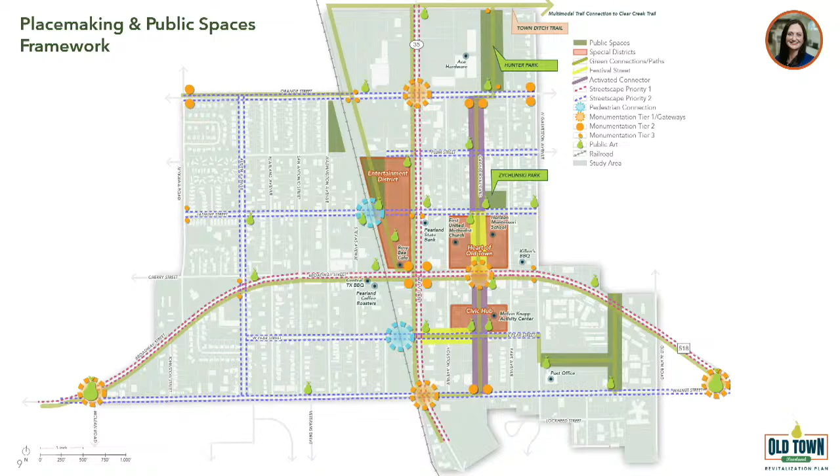Moving into our development and redevelopment framework, this is a compilation of previous planning analysis, previous plans that you all have done, the 35 corridor study, as well as our analysis that we've done as a team, and then the fiscal market economic study that was completed.

So the primary opportunities are displayed in orange. Those you can tell are correlated to the big idea areas as well, but those were the largest swaths of land that were available. So those are our large development sites that we targeted.

The light blue, secondary opportunities, those are areas where we're trying to develop that destination and critical mass. Some of these properties may be designated just from lower value or low intensity. So there may be more parking than necessary on these sites, and there may be an opportunity for some site development or enhancement.

And then other opportunities as well. Those are the third tier of opportunity that we've cited, a little bit more involved in creating development along those sites. So we've created 3 levels, 3 degrees of development opportunities with this graphic.

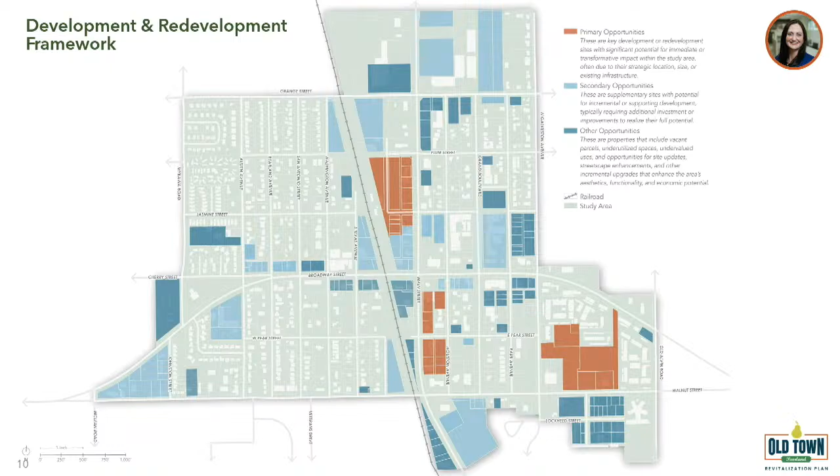One thing we want to share with the group here as well is that we've identified, as you'll see, 5 big ideas, which we think are the first directional phase to implementation of this plan. We recognize as we get into it this afternoon, some of them are going to be short-term solutions that could be almost readily available to jumpstart and build some of that momentum within the Old Town area. And we recognize some of the big ideas are going to be a little bit longer planning terms. There are other factors that go into it as well.

But this map, we don't like to use the word low-hanging fruit or anything else along the planning process. We really like to identify those immediate wins and opportunities, and that's why you will see some of the ideas. What's in orange is really those things that the City Council and the PDC can focus in on right away, and from an attraction standpoint potentially look at development or redevelopment opportunities. But this map also is really a guide for development and redevelopment within the Old Town Pearland area.

Again, looking at different factors, there are other parcels that can be taken down as part of this planning process and evaluated as to where development and redevelopment could occur within the area as well. So it's kind of a priority of first, second, and third, but it's really the guiding framework to where we can start prioritizing some of those incremental investments as well.

Are there any questions so far? Okay, great. All right, let's jump into the big ideas.

This is our key map identifying the 5 major big ideas that we are presenting tonight. The first one is the Depot District. The second, the Grand Link, that's Grand Boulevard from Orange to Walnut. We have Sender's Square, which is near the post office in the southeast quadrant. And then number 4, Old Town Main Street, which is the Broadway Walnut one-way pair conversation. And number 5 is South Junction, just south of Scooters off of 35. These are our 5 big ideas that we are going to discuss.

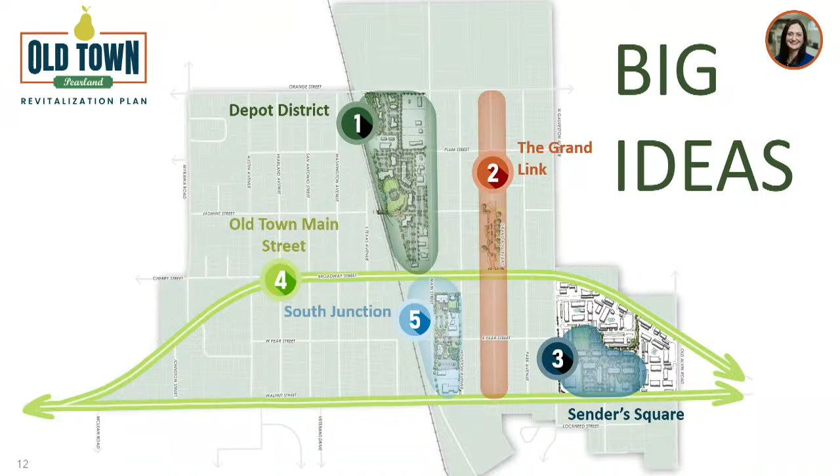Big idea number 1, this is the full extent of the image. Far north is Orange, far south is Broadway, and we've got our railroad tracks on the left and bound on the right by Main Street.

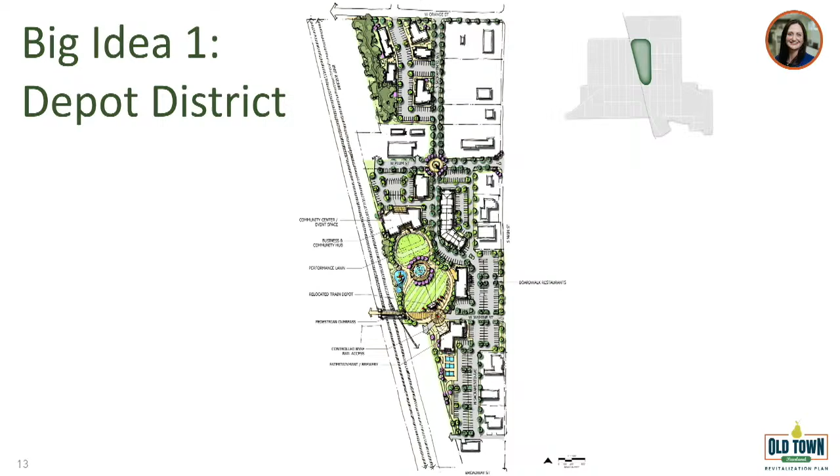Here's a little closer view so you can see the heart of the concept. We've got a major flexible green space. We're creating a community gathering space. We want people to come here after work and have dinner.

There's an opportunity for some amphitheater in the top using the business and community hub. The idea is to have a patio, an elevated space that presents and is able to project onto the sunken green space lawn. So it's almost an amphitheater kind of flex space.

So when it's not in use for an event, it's also just a flexible play space for families. We've got some playground there.

We've got the relocated train depot down at the bottom, which is also surrounded by an art history wall, the Story of Pearland art wall. And then there's our pedestrian overpass just south of that. That's going to be a critical connection for this site, connecting the neighborhoods on the other side of the railroad tracks to this amenity and really creating that connection, which is currently a huge barrier.

The railroad has been a barrier for pedestrian connectivity, so this will be a big choice for this concept.

We've also got space designated for restaurants, entertainment, and brewery options, and we've reserved some space for existing businesses along the major main corridor. In the brewery space, we were talking about some yard games, some mini golf, and restaurants with outdoor dining. So this is a very activated space.

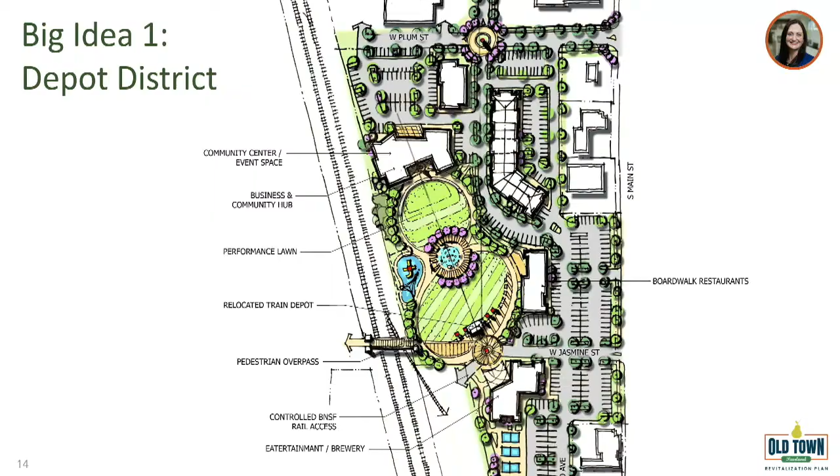So, questions on Big Idea 1?

Are we going to stop and take questions on each one of these ideas one at a time? I think that's probably the best way to do it. So why don't we take a second and open up to council for questions and comments.

Because I did the math, and unfortunately it's wrong. Our city sales tax is 1%, and the EDC is 0.5%. And I think it's calculated at 1.5% for city sales tax.

I was looking it up on the comptroller's website where they have a local sales and use tax history, and I think what they do is our total between us and EDC is 1.5. So it's 1% to the city and 0.5% to... I was using 0.5 cent for the PDC. Our other 0.5 cent the county has. Okay, maybe that's it then. So I misinterpreted, apologies, just wanted to make sure.

Any other questions? I guess I appreciate the comment about forgetting about numbers for now, but this is a great, pretty picture, and I love it, and we can sit here and daydream, but this is a large price tag. At some point, I'm excited to see what we can actually accomplish, and if this is one of them, that's great. Maybe we can talk about funding sources at some point, but I hesitate. I get apprehensive that it's another great plan that everybody can look at, and in terms of implementation, this one alone is 13 million, and those estimates may be low. So I don't know, that's me trying to put a damper on the comments about sitting back and daydreaming.

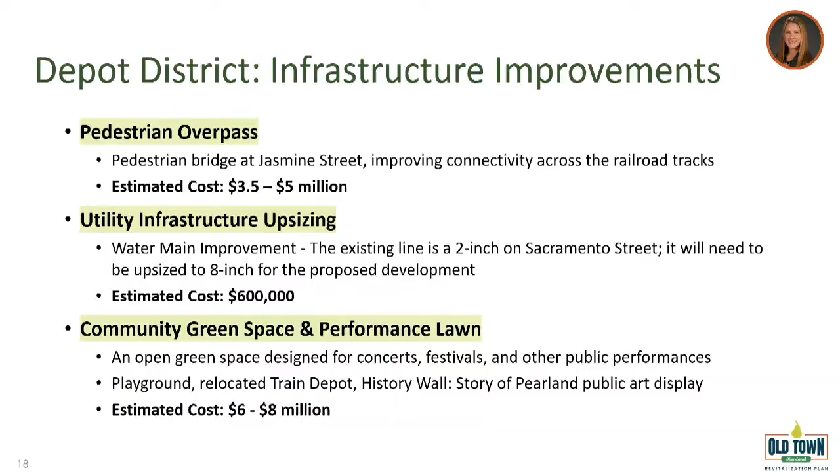First off, what's not on here - I did have a question about the depot. Is that assuming this depot gets moved back, or is it something new that's erected? We heard a lot of feedback through the planning process that there would be a desire to relocate the depot that is currently here back to Old Town, to its original grounds. And so the amphitheater and the green space planned in there was to really enhance that. Again, as Michelle mentioned early on, the art history wall and everything else is really a tribute back to the depot location and the starting grounds of where Pearland began.

So yes, that would be. I would love the opportunity to see it relocated back down there for the right reasons. I wonder if it would survive the move, and that number is not in here anywhere. That would be public.

So I don't necessarily think that everything we're talking about here is public money. I don't see the city necessarily buying the 8 parcels. We're going to find the right developer that we're going to partner with that's going to come in here, and they're going to do that - they're going to do some of the infrastructure, public infrastructure, just like they would with any other developer, right?

The green space - part of the question I have is, is that something that we own? Is it something that a developer owns? Is it something the developer schedules different events for? Is that something that us, along with Tracy and Visit Pearland, schedules and helps put together? I think there's a number of ways that we can get that done.

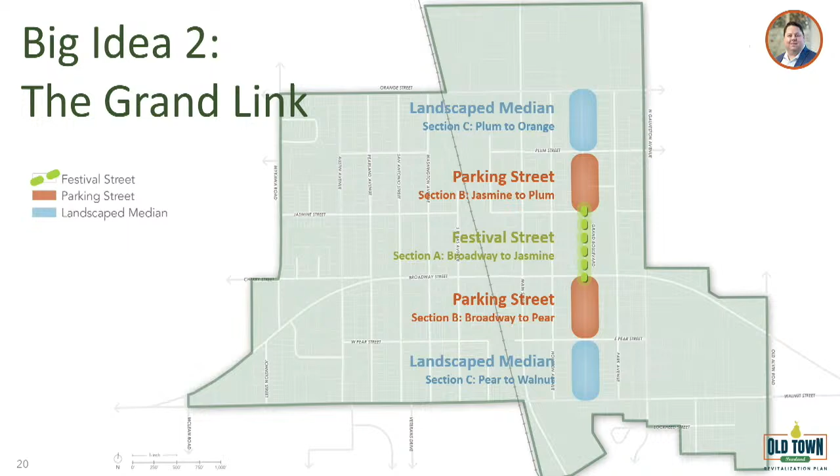All right, going on to big idea number 2, which we're calling the Grand Link, and it's really broken up into 3 different sections. This first section we want to talk about is what we're considering as the Festival Street, and what's out there today, the Festival Street we're proposing is from Broadway to Jasmine.

What you see identified on the map here, the green dashed line, is what's out there today along Grand. This is a concept we're bringing forward to recommend creating this block as your Festival Street that can be closed down. This is kind of a tandem to a bigger idea, number 4 later on, that talks about the heart of Old Town as well. But from a destinational standpoint, and from what we've heard through the Cultural Arts Master Plan and all the feedback we received, it's really about identifying different opportunities for festivals and reasons for people to come into Old Town. We believe this is one concept that could have a lot of traction here.

The Festival Street, as I mentioned, is from Broadway to Jasmine, and would involve converting it, removing the pavement that's out there today and bricking it over. On top you can see a configuration of what would be the day-by-day use, maintaining the parking that's out there and the drive lanes. The entire road of Grand right now, though it is a public road, should be considered almost like a parking lot when you look at the 3 sections linking together at the end of the day.

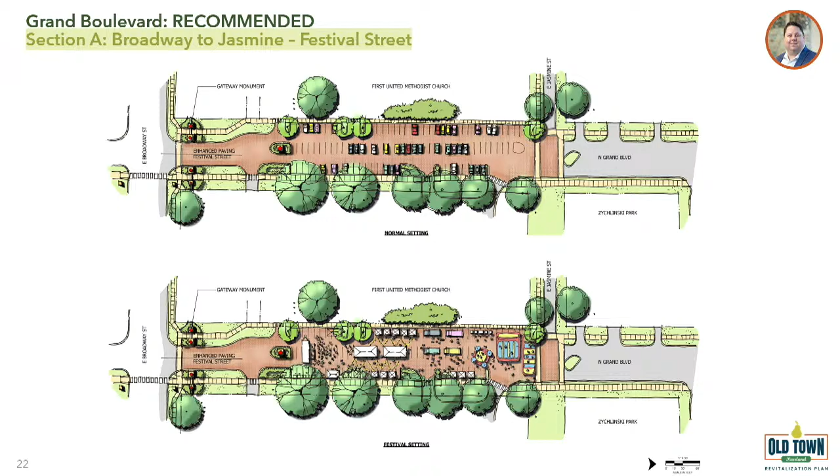Just to the north of Jasmine, on the northeast corner, would be Zychlinski Park. We've had a lot of back-and-forth conversations about whether we want to extend the Festival Street further or not. We'd recommend keeping it at Jasmine, just from a traffic flow standpoint and to maintain the parking that's out there. There are some existing driveways and homes across from the area, but we feel the look and overall feel is better this way, especially since it's not activated out there today.

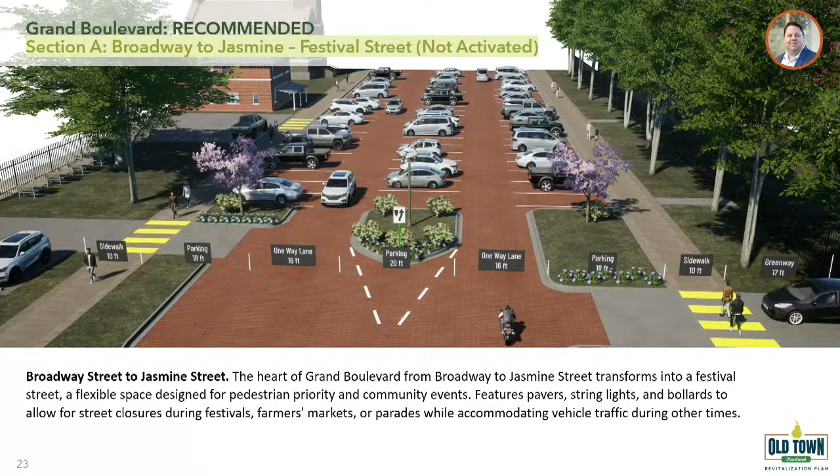So again, you have the entire space within the right-of-way to be activated with all different events, whether it's a farmer's market or any other type of event that could be part of that activation. I'm not going to go through all the numbers here due to time, but you could certainly break up Grand into different phases if you wanted to take an incremental step approach.

Baxter did run some initial numbers on the first phase, which would look at a full reconstruction of the roadway out there, putting in the brick, and different pedestrian enhancements at both intersections, including the expanded sidewalks.

We would recommend the potential for utility burial there as well to really make it a pedestrian aesthetic space along there, with some decorative lighting and street furniture. Also, what's not shown here is we suggested different public art displays along the entire corridor.

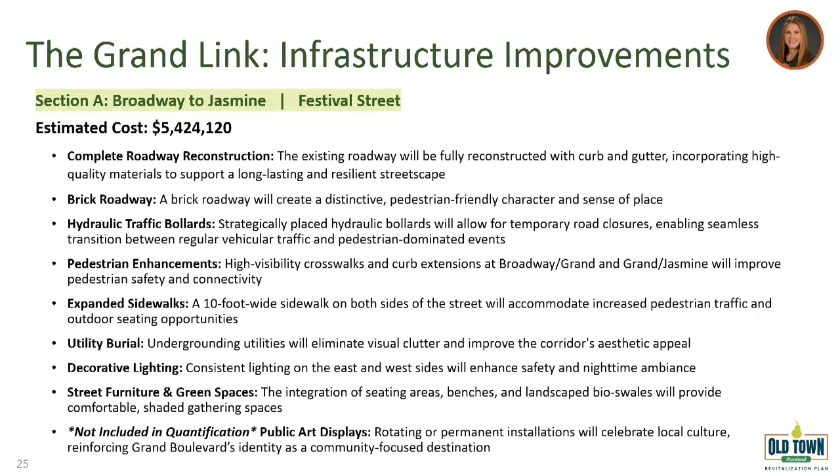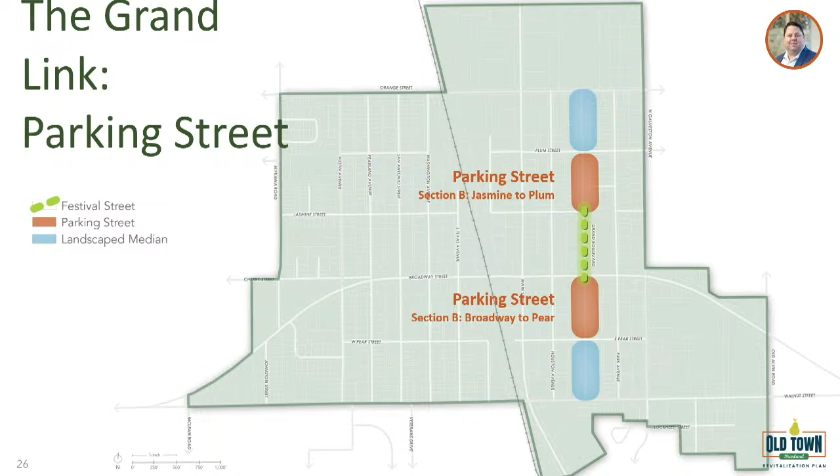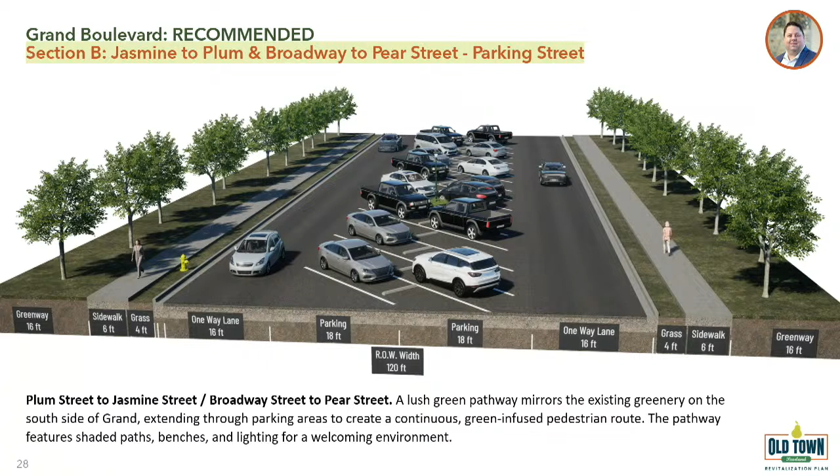This is what we would suggest as a long-term recommendation. We still think keeping the parking in the middle is most beneficial to maintain the character that's out there today. But this would be a reconstruction, putting curb and gutter in along the streets, really defining that public edge that isn't really there today. Right now you just go right off the road to the sidewalk, so we want a pedestrian buffer with a lush green space on either side, with the sidewalk adjacent to it.

This really ties into what's out there today with minimal cost to reconstruct. We'd want to widen the sidewalks, really defining that area, with center parking using removable stop blocks. If you wanted to expand it or close another block off for festivals that got grand and grandiose needing additional space, you could do that — really looking at having a wide open space in general, incorporating decorative lighting and street furniture along those lines.

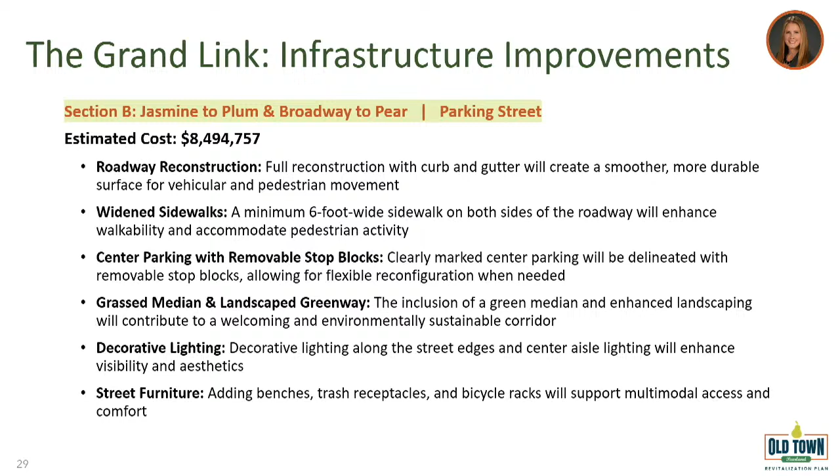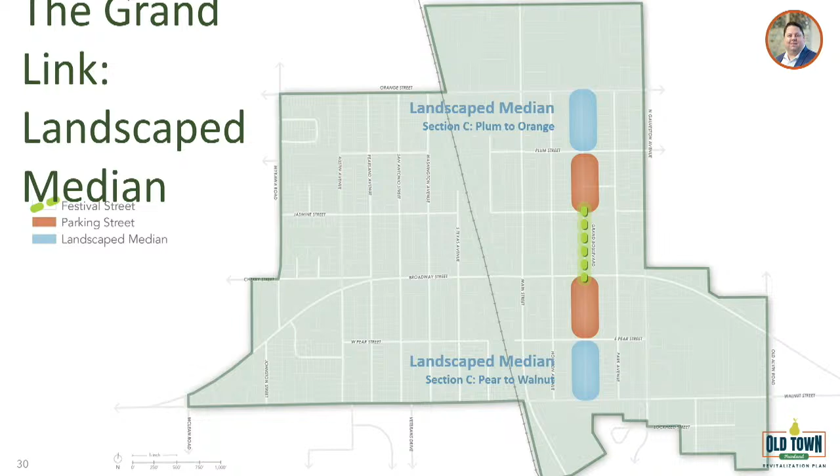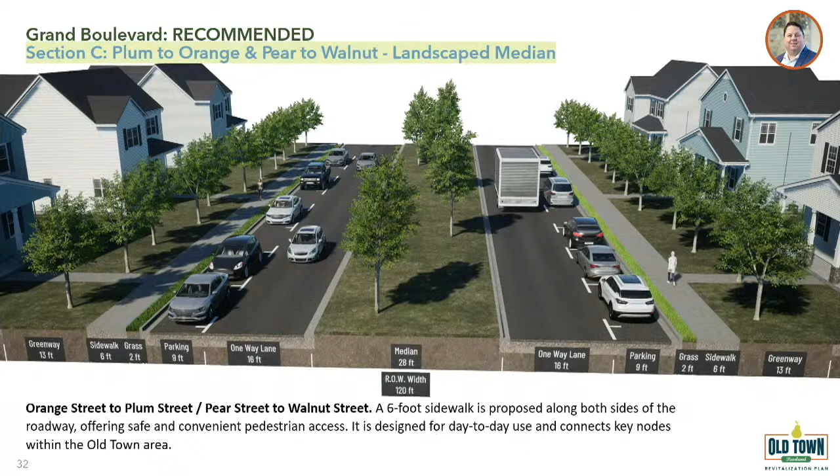Continuing to maybe look at putting in some parallel parking there. You have a pretty wide right-of-way out there today; this may need a little modification. Some elements have been recently reconstructed on the southern side, with parallel parking on the side of the road. We understand this probably needs updating, maybe putting some islands out there to break up the parking and everything else.

But in general, maintaining the same character that's out there — we don't want to be ripping out trees as much as possible. Throughout this whole corridor we try to minimize taking out the existing tree canopy, not eliminating any trees, but enhancing it to maintain the character that's out there today. On the south end right now you just have a very blank green median, so we're looking at incorporating additional landscape and trees, and continuing to expand the sidewalk to create that north-south connection all the way through, defining the overall public right-of-way and separating it from the pedestrian standpoint. Our team has also put some numbers together for what it would take to reconstruct some of those sections.

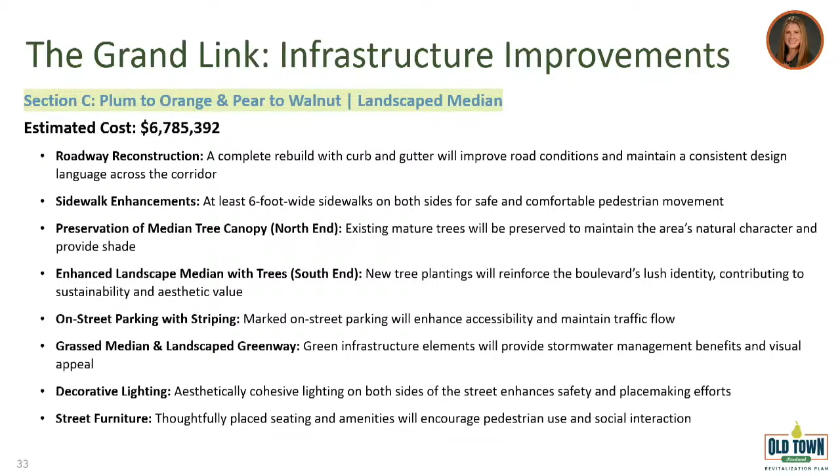That was a lot, pretty quick, but... Yep, start with you, Henry. Thank you, Your Honor.

Just a quick concern — I love the in-to-out approach, focusing on what could be the festival-type place with additional parking on the interior, then slowly minimizing that as you get into the existing home space. My concern is I don't know what that would look like from a potential festival right there at 518, crossing into parking, the majority of the parking space, the green section, and how it ties into Broadway, whether Broadway is one-way or two-way at that point. That would be my only concern, but other than that, it's a great concept.

I think Grand Avenue has always been set to be redeveloped and do something nice with. I'll say I had an even bigger sticker shock when I saw some of those prices. But looking at what we can do, and maybe when we break down some of these costs and where we can have savings, and especially if we can piecemeal parts of it to what we want to look at, I think it's nice to say, let's do the whole Grand Avenue, but maybe it's let's create this space, and that's something we can focus on.

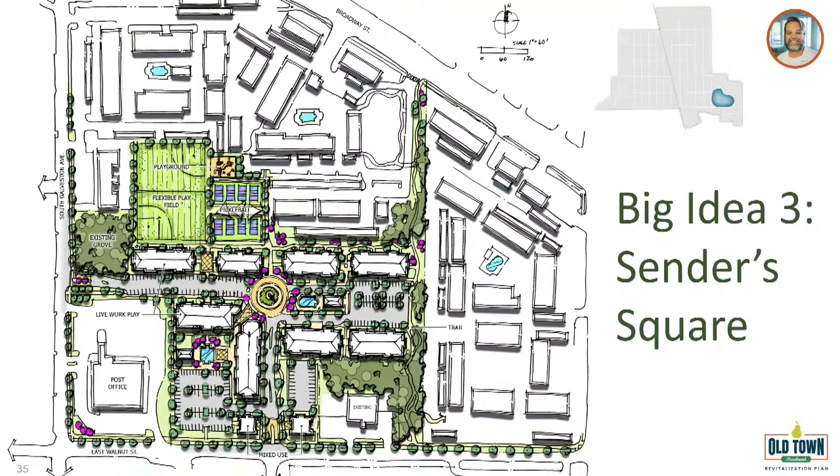Now, the redevelopment stuff is not shown on this map. It'll be on the other side of Walnut. But that's a summary of these things. These are all internal pieces.

Steve, you want to go over this?

I'll just say on the numbers, similar approach was followed to what you saw for Big Idea 1. So you can see the estimate there of about $140,000 annually in property tax collection.

Okay. Any questions on 3? Open up to Henry and your gang.

I'll start. So again, great concept. My initial concern would be parking. If you're doing a multi-level restaurant, livable space, workspace, multi-level there, that's a lot of parking that's coming through.

I don't see a lot of gray color. And so I fear maybe a multi-level parking deck to support it, but I get it. It's Old Town, and that might not be the best. But again, if you're looking at City of Sugar Land, that's got all of that. They've got a multi-level parking deck that supports all of that, right there in that town square area.

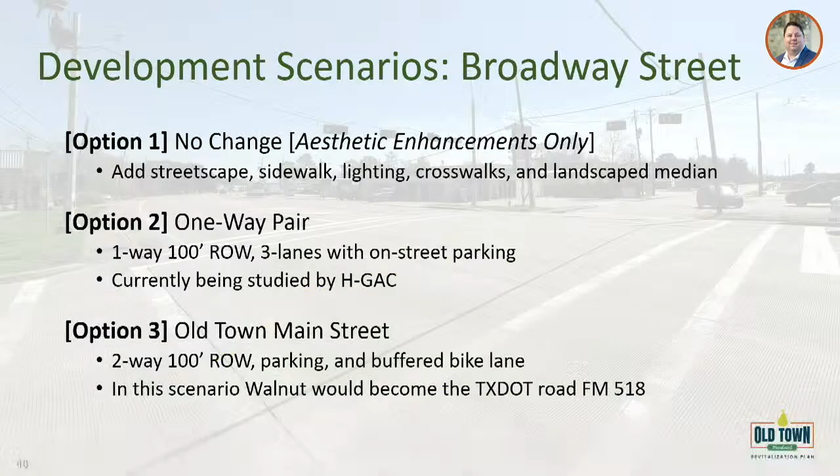That option is looking to consider redoing Broadway as more of a 3-lane cross section. So this would reduce the lanes currently there from basically 5 lanes down to 3. You would be putting in a center grass median turn lane to support turning movements at key intersections along the corridor. This is from Woody Street all the way to Barry Rose Road, the big eyebrow of Broadway as a whole, as you can see on the map. It's about a 1.7 mile road reconstruction that we're considering.

But taking into consideration all the feedback and wanting to make this a walkable destination, connectivity, a place for people - really what we think is best for Old Town - this puts the focus on people over cars. What we're considering here would be just 1 lane of traffic in either direction, on-street parking, wide sidewalks, greenways and buffers, along with the addition of a cycle track.

Both your mobility plans and other plans out there today identify some form of this. You have an existing bike lane right now that is pretty unsafe, in our opinion. So providing more of a protected buffer along Broadway, we think, would be a huge improvement to this area. But we understand that this transformation is not going to happen overnight.

This is something that, when we talk about the 5 big ideas we're presenting today, is not going to happen over the next year or two. There is planning, there's a lot of things that need to go into it, but we think setting the vision now for the long term would be in the best interest of what Old Town could be moving forward.

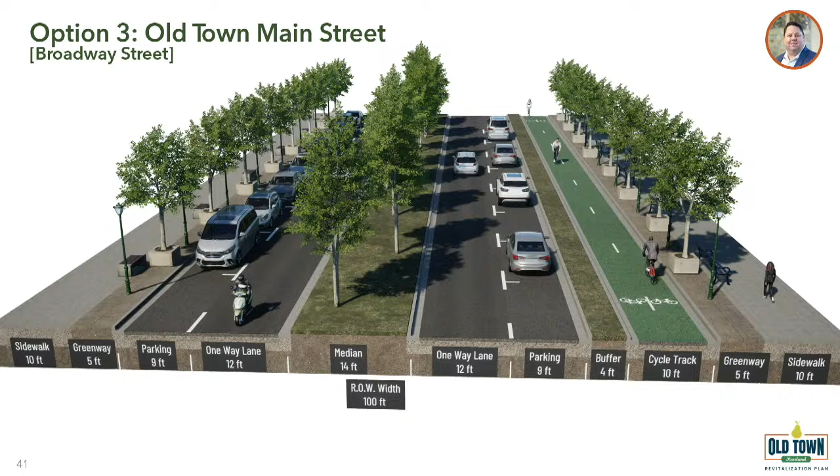Looking at this from a program standpoint, this is really about reconstructing the roadway with infrastructure upgrades as well. As I mentioned, the reduction in traffic lanes, the landscape median - right now we're estimating anywhere between 50 to 75 million for this 1.7 mile roadway at today's dollars.

One of the big things that needs to be worked through is the underground utilities, franchise fees as part of this planning process. But the benefits you get from the people and the public perception would be that buffered cycle track, the enhanced greenways, the expanded sidewalks - really that public realm and place that you want to call a destination for Old Town. We think that could be achieved by going this direction and considering Old Town and Broadway Street as your main street.

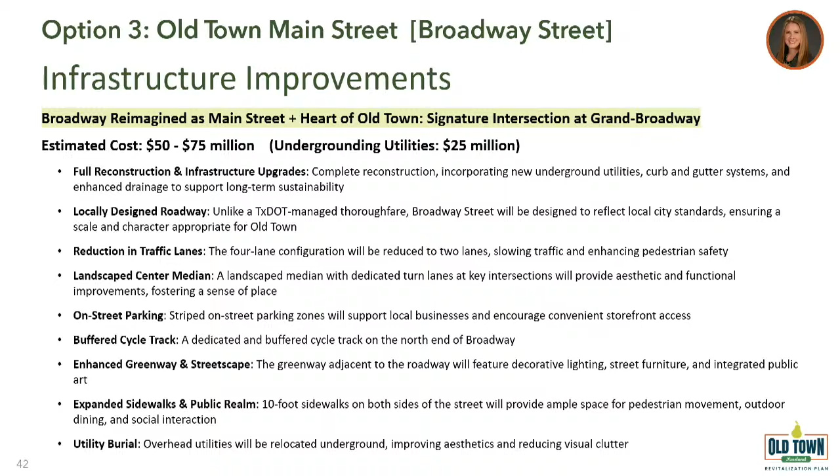Included in that would be an extension - we talked about big idea number 2, the festival streets, which is really the connection of Broadway and Grand. We see this as kind of the signature intersection, so we would look at creating a raised intersection there. The assumption here, and we'll get into what happens on Walnut Street as well, would be a potential turnback program. This would most likely be long-term, potentially a public road that would be turned over to the city at some point as part of this.

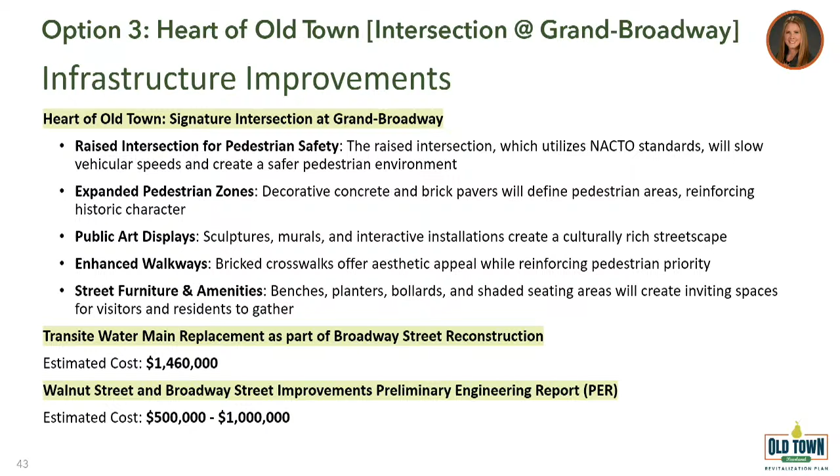But again, it's the opportunity to slow down the traffic, really focus on people, expand the pedestrian opportunities here through this enhanced and pedestrian-safe raised intersection at Grand and Broadway, along with different street furniture. So a raised intersection is really narrowing in the area, almost creating an elongated speed table going through this area. We don't anticipate this would be a stop-and-go light, maybe at a minimum a stop sign, but it's really focused on slowing the traffic down, creating that heart of Old Town as part of this enhancement along Broadway as well.

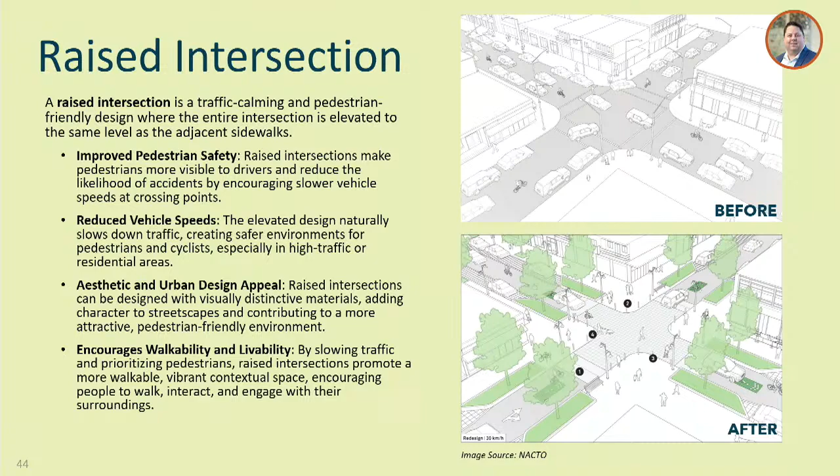In order to achieve this option in this vision, you would need to look at the expansion of Walnut Street as well. Right now, Walnut Street is for the most part a 2-lane road. We understand you're evaluating it as part of your one-way pair study, but looking at today, from a phasing standpoint, this would become your future FM 518 - the major east-west thoroughfare connecting Broadway on either end, with Walnut being designated as the new FM 518, and Broadway then being turned over to the city long-term.

In this scenario, there would be additional right-of-way required to implement this vision. You have chunks of Walnut right now that are anywhere between 70 and 80 feet of right-of-way. You would need to acquire some additional right-of-way to put these enhancements in. But again, this is a scenario to transfer the lane usage.

We're looking at what you have out there today, which is 6 lanes between both roadways. You're repositioning Walnut Street as the major east-west thoroughfare, and then really converting Broadway into that pedestrian realm and environment that we feel is extremely beneficial and meets the goals and values of what Old Town Pearland could be long-term.

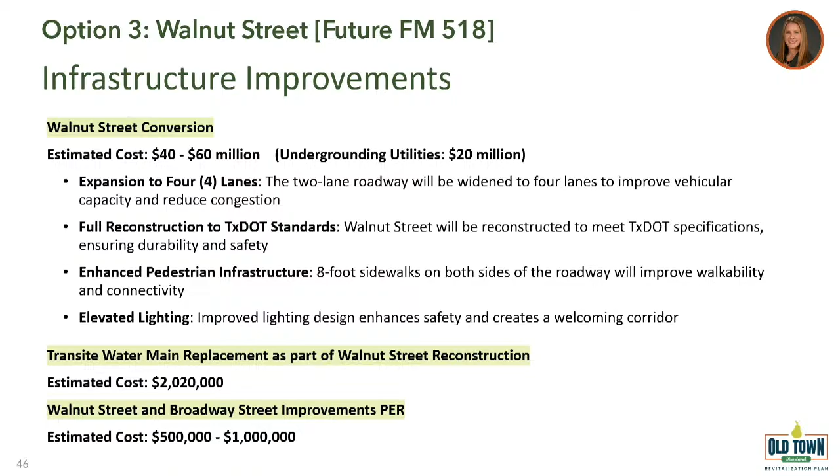This was imagined in 2007 as part of their downtown plan for this community. It just got reconstructed a couple years ago. So we're looking at a 5-10 year planning and design process in order to achieve what Lancaster did. But this is not unrealistic to achieve.

And when we look at the people-centered revitalization effort that occurred, here's some of the key strategies: they did a travel lane reduction, they looked at different traffic calming measures and pedestrian prioritization, and they incorporated different public plazas and outdoor dining.

We understand your built environment does not completely follow this right now. There would be change over time. I think you have some of the bones available today, but very similar to what happened on Lancaster Boulevard, there were additional economic benefits that came in - over $280 million of new private development, 50+ new businesses as part of this revitalization effort over time. And it really turned into that place that people wanted to come to for this community.

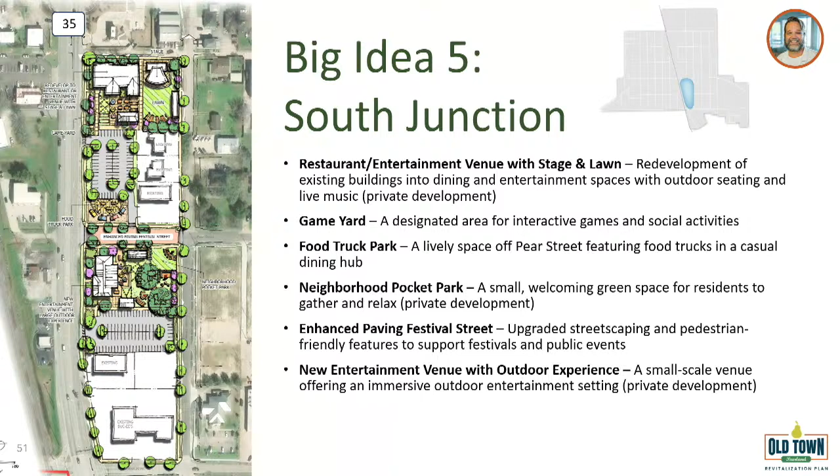So food truck court right here — is it on the next slide? Oh, well, here it is rotated. A little easier to see, food truck court right there.

That's an accessory to a Festival Street piece — if you wanted to have an event from there to here, you could close that down. It's a very manageable piece; all you're literally doing is making it feel like a multi-use space by changing the paving, and then you can close it at either side. There's plenty of network grid around there from a transportation standpoint. Now you've expanded your ability to hold events and festivals, and encourage private development as well. The public investment piece of this is very small — it's private development, but there are things we could do to enhance it that would benefit the community.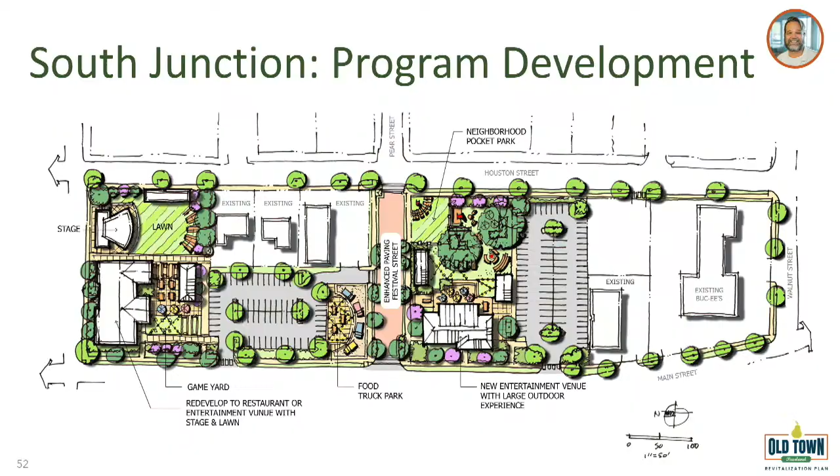One little thing as we wrap up - if somebody could, during the wrap up, give people in the audience and those watching the timeline or the future here. I think you're going to have an open house tomorrow, just the details thereof. Thank you.

Anyone else from planning and zoning? Any comments on that last piece? All right, throw it open to council. Chad, you got something? I'll go.

So moving forward, what's the plan? I know you're looking for feedback, and then once you gather all your feedback, then what? What's the next step here?